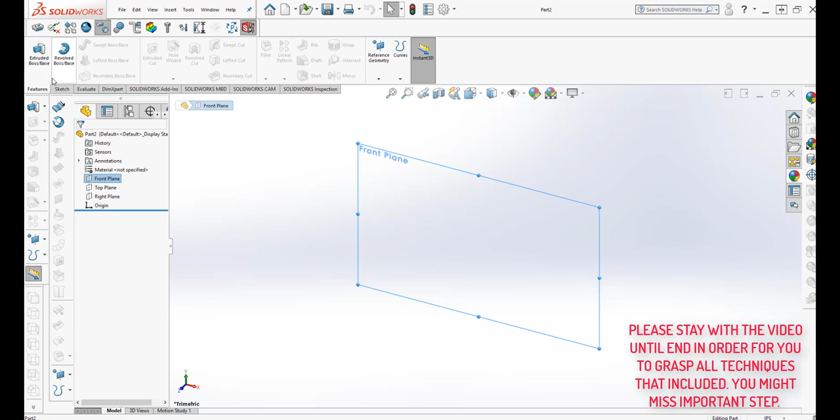So let's do the front plane and then sketch, and let's draw a circle. Let's set the document properties, units in inch, that's okay for now. And now let's do some dimensioning, it will be something like 5 inch.

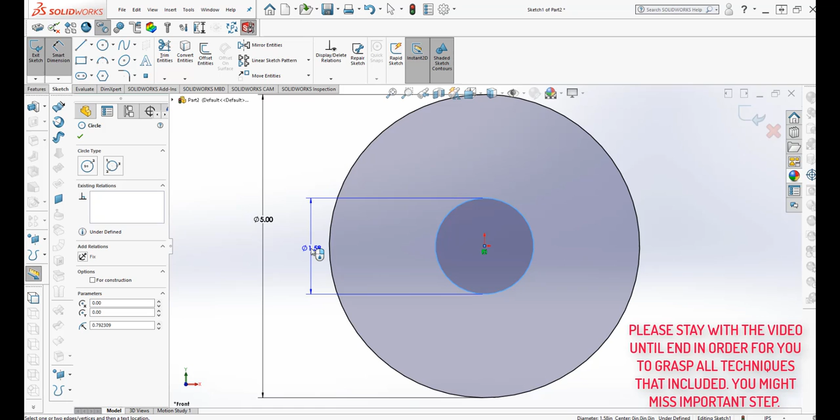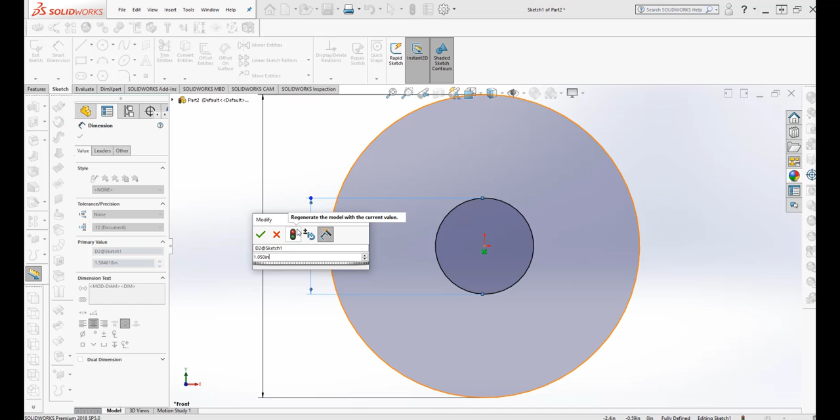Let's get out of that, and then make a circle that is, let's say 3/4, but the real dimension will be 1.050, that is the pipe size dimension, in inches. Regenerate the model with the current value of 1.050, and click OK.

Now you can see that there is a hole now, a big hole and a smaller one, both circles.

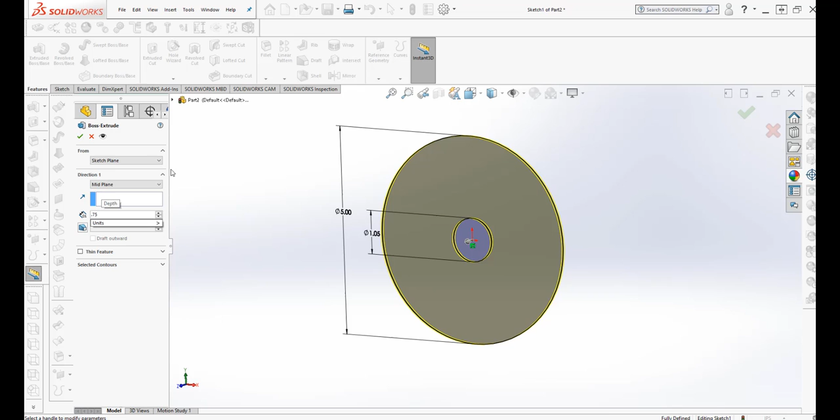Now let's go to Features, and then Extrude. I want it to be in the middle plane, that's the mid plane, and I want it to have 0.75 of an inch right there. So you can see that it was made like a flange right now. Click OK.

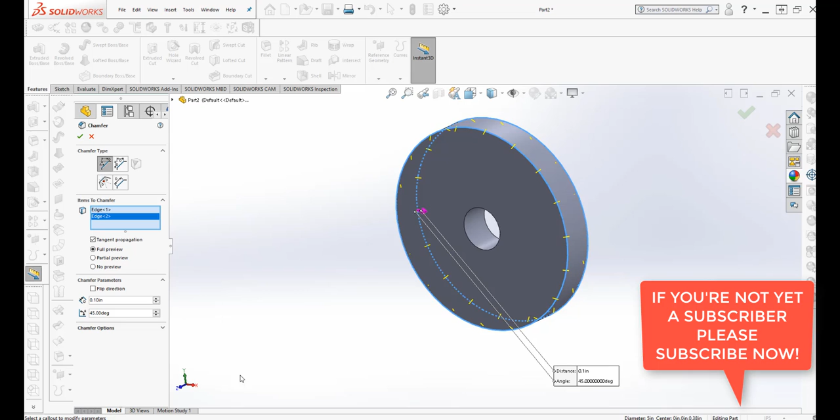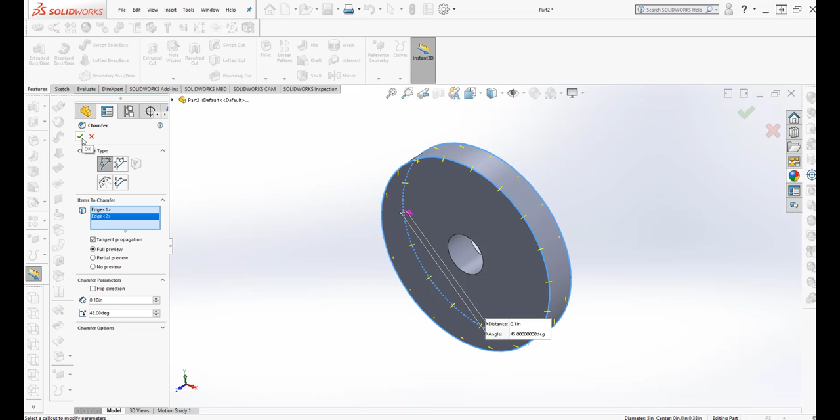Now let's do a chamfer onto this side and this side, a little bit smaller. Let's do 0.1 as the unit of an inch. Now you can see there is a yellow preview, that's a chamfer. So with 0.1 and a 45 degree, click OK to get out of the chamfer dialog box.

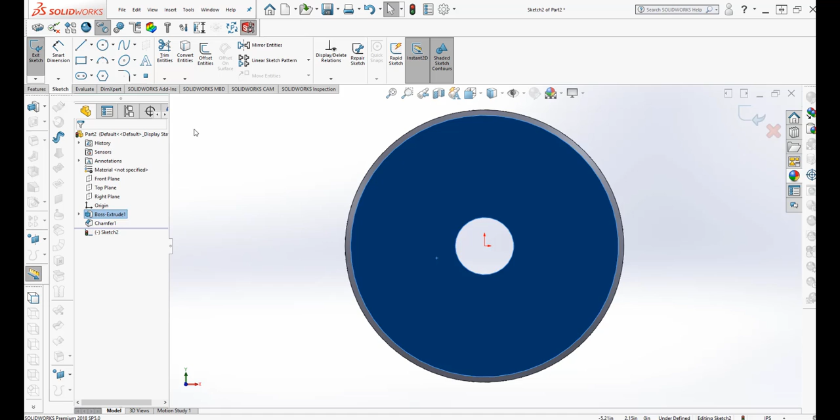Now you can see it's more nicer, more finer. So let's go to Normal view on this one, because I want to have a sketch again. Let's do a sketch here, that is Convert Entities, and then offset that.

Going to have something like 0.25 of an inch. See that, 0.25. So let's get out of the Offset Entities.

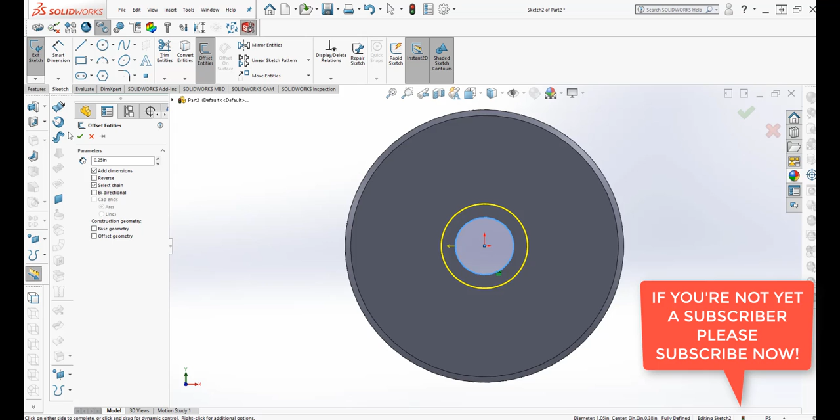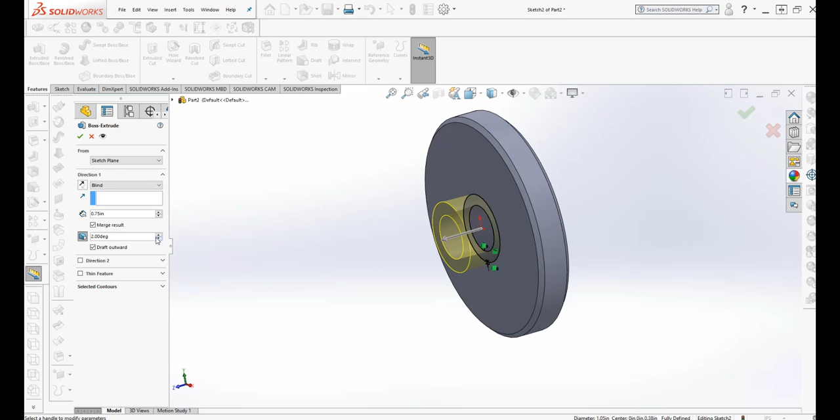Now you have 2 circles, and let's do Features, Extruded Boss, so it will be like a mesh. I wanted to have it go upward. Doesn't work, maybe it's just a very small degree, so let's just use that way, and merge blind 0.75, click OK.

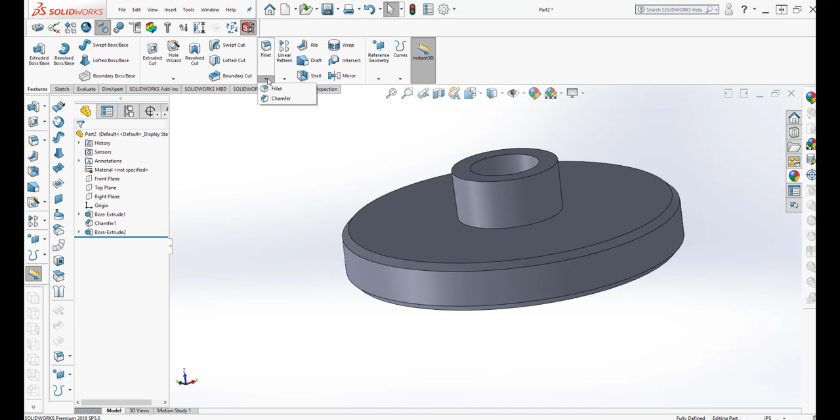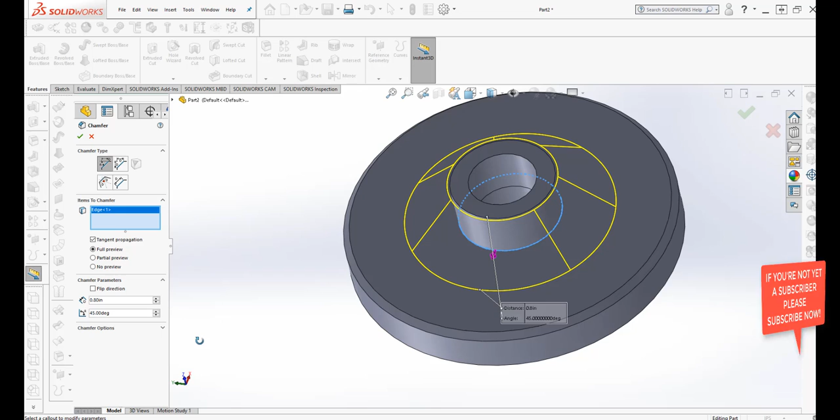Now let's put a chamfer on this one too. I'm going to increase the length so it will be nicer. Let's reduce that one to have it 0.5 of an inch, and let's get out of the chamfer. That is full preview, 0.5, 45 degree. Now it's nicer to look at.

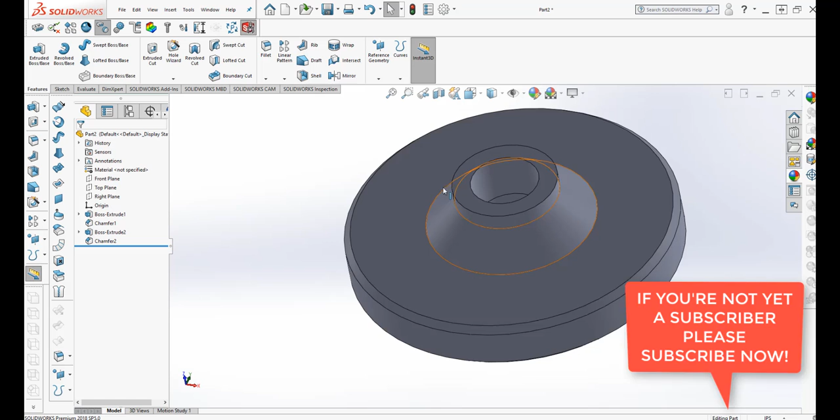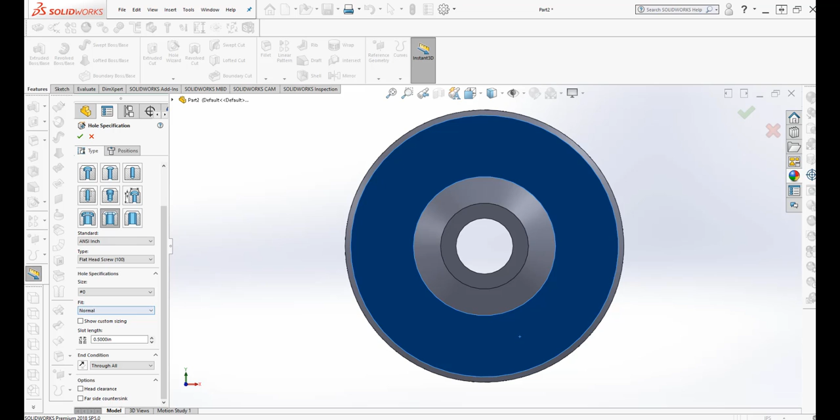Let's go to the Normal tool, and I'm going to use the Hole Wizard to make a hole onto this area. Let's do a countersink hole. Let's try it again with this one. It's 3/8 with the countersink head.

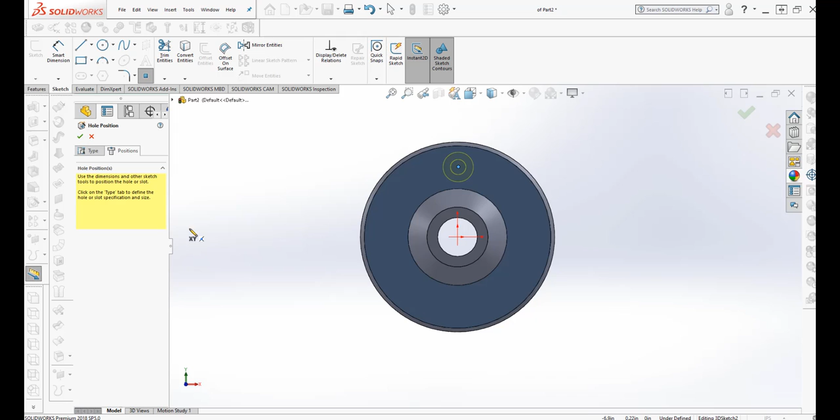And then let's position it. Let's put it here. Okay, now I've got one hole, so let's do some editing of the countersink.

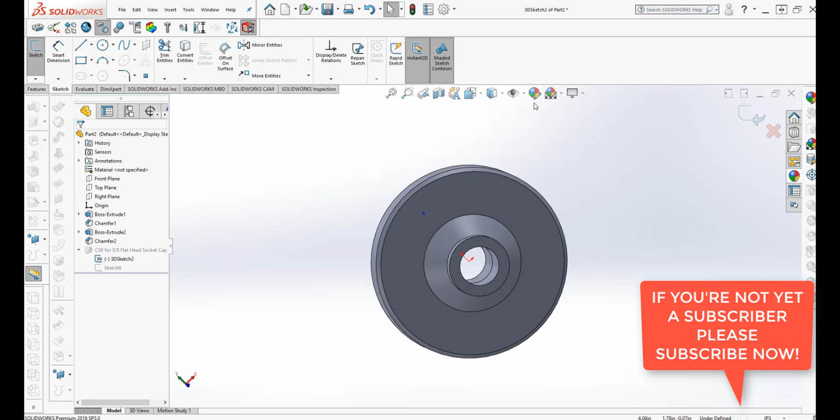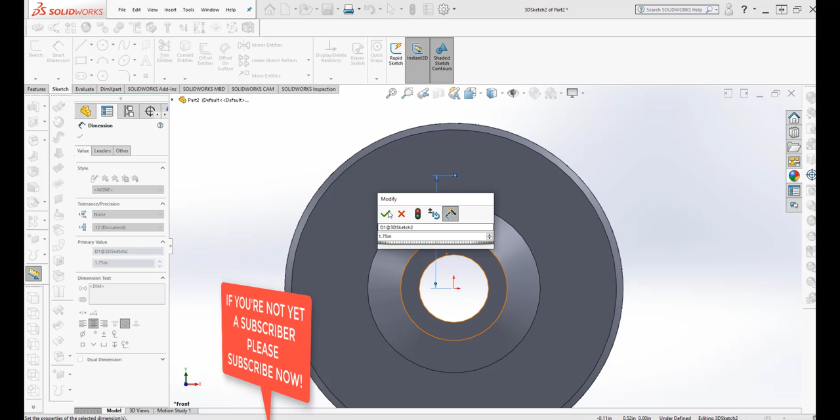Let's try to measure that one from here to here, it comes to 1.75. I did 1.75 on that one. So let's do the right thing. Let's get out of the drawing edit mode. Now I have one countersink made.

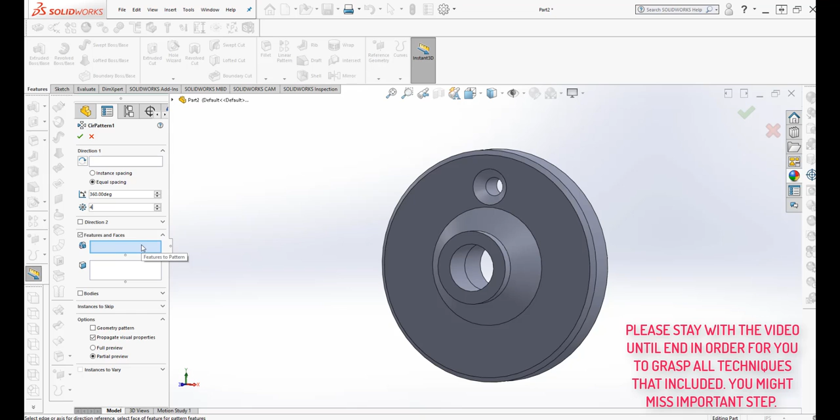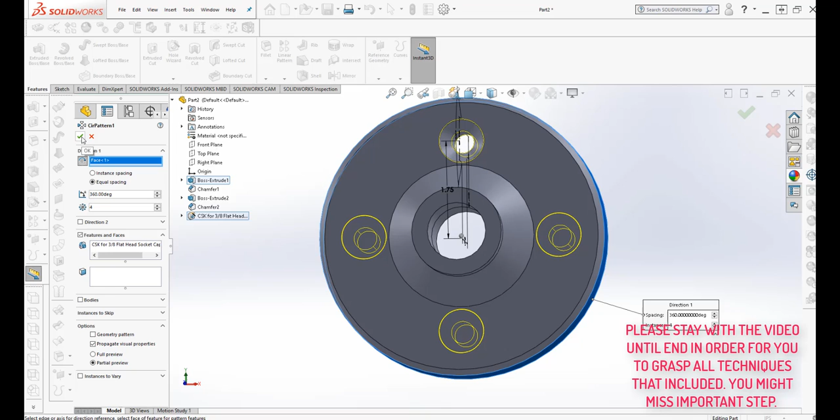So I wanted to have a circular pattern on that one, with four instances on this area, and the feature to copy is the countersink, and the rotation will be this one. You can see that it copies 4 times at 360 degrees rotation. Let's get out of the circular pattern dialog box, click OK. Now you can see it's been fully made with holes.

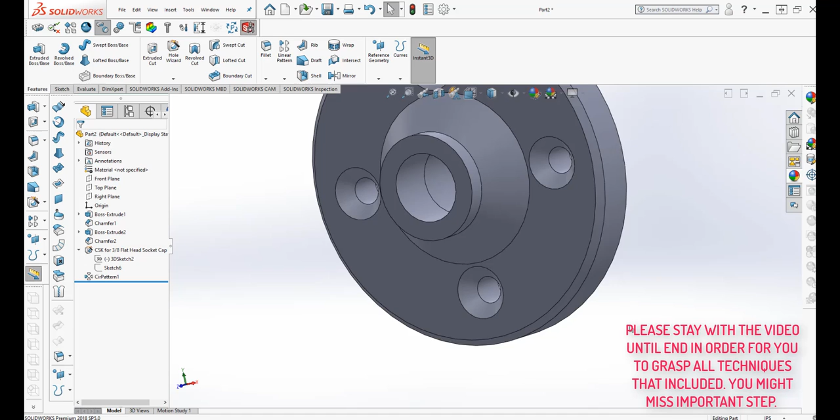So now let's get a thread on this. Let's redo the editing of the thread, I'll put it a little bit longer. Let's do the thread as 2.5, or where is that one? It's supposed to be, let's say 3.

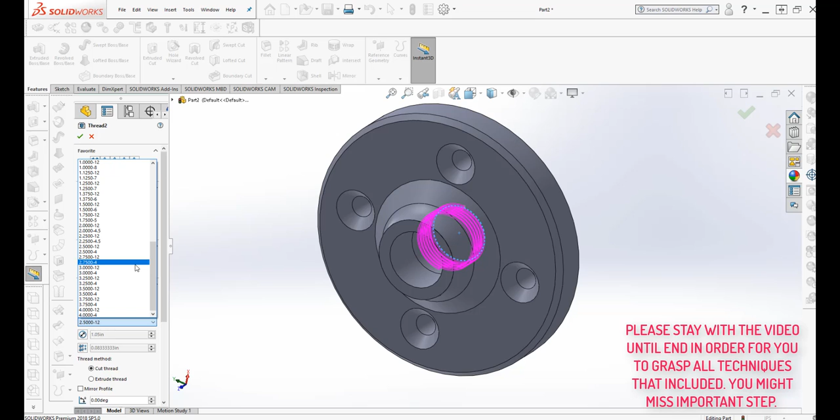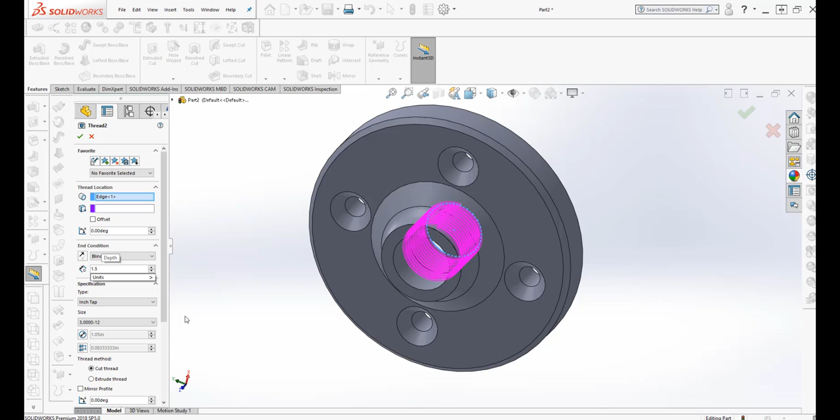And then for the revolution, now it will be blind. Let's increase it to 1.5, so it will be threaded. Now it's fully threaded.

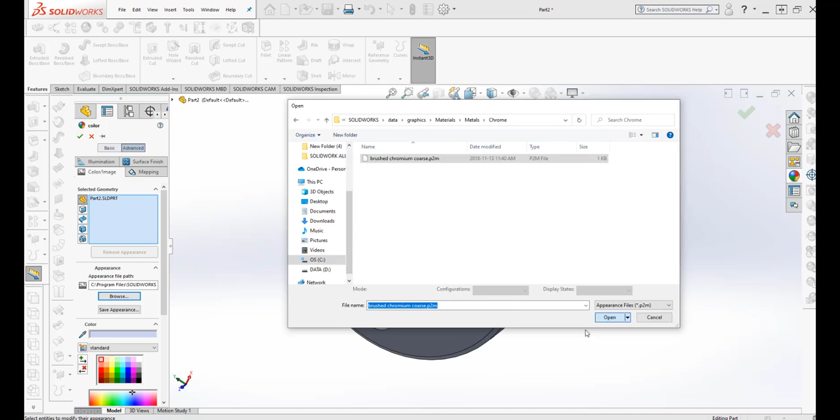Okay, that's right. So let's now go for the color, we'll put some color with this, Advanced, then Browse, and go on to Metal, Chrome. Let's do coarse chrome and get out of the dialog box. So it's chrome right now. Let's check it out by rendering it.

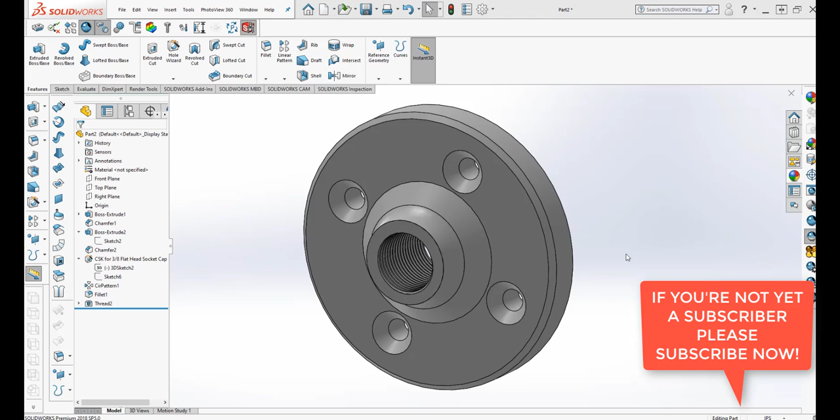Let's go to Render, let's do the final render. Continue. Sorry for that, a little bit darker. Okay, see that it has been done properly.